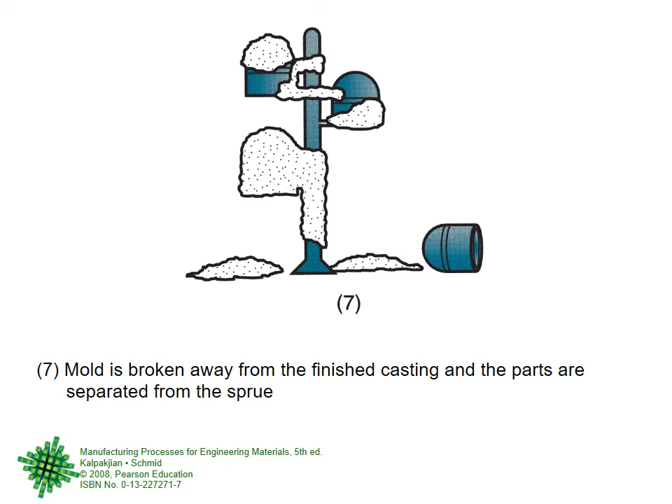As we do many times, I have collected figures of the same process from another source, and once you look at it with different figures, it is easier to understand. So here is a schematic illustration of the investment casting or lost wax process.

Castings by this method can be made with very fine detail and from a variety of metals. So first, a mold is used to make the pattern, and the wax pattern is made using injection of wax or plastic, followed by ejection. So you make a pattern to create the wax pattern, and then you make many of these.

And then you make the cluster, the pattern assembly, also called the pattern tree.

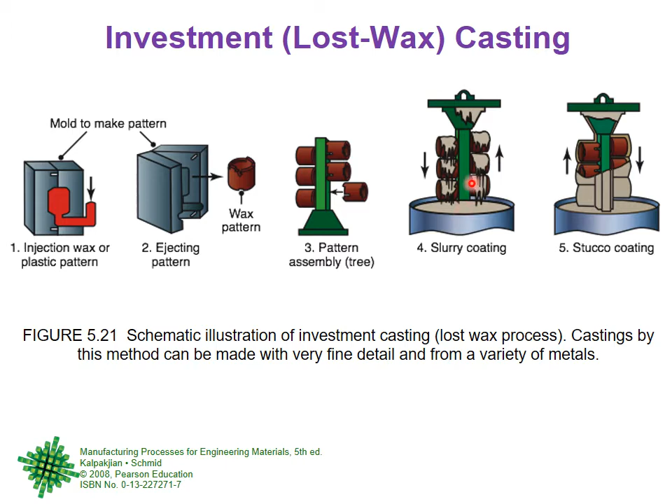And then you take this whole assembly and dip it in the slurry coating. This process goes on, up and down, so that it is very finely covered inside and outside with fine refractory material, and that forms the shell.

So now this is the completed mold. You do a little bit of heating so that the wax melts out.

All the wax will go, since it is in the inverted position. And even after the wax goes away, you keep on heating it so that the shell becomes strong. You call this baking.

And then once it is ready, you do the pouring. Once it pours, you do the shake out, and the casting is there and the pattern is gone. So this is the shell pattern, and you get whatever part you want. This is the whole method.

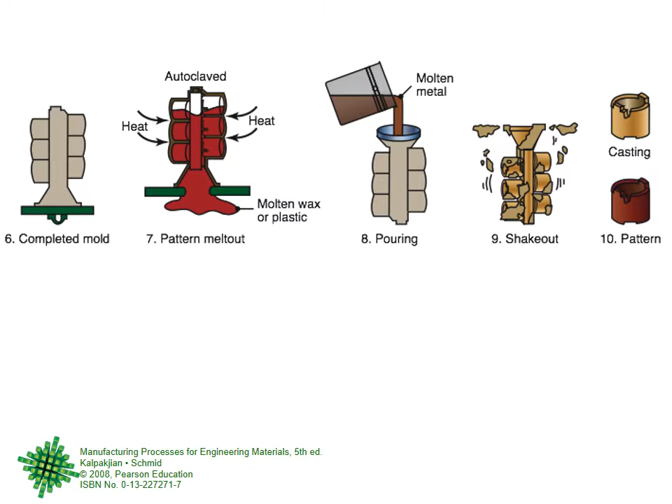Here we are showing you a one-piece compressor stator. Whenever there are moving parts, there is a rotor and a stator - a stator is the stationary part, the rotor is the moving part. Just see the amount of detail here. Very complicated geometry. If you had to machine it out, my goodness, the amount of machining required would be incredible.

But if you do it with casting, the casting method must be very accurate. It is not normal sand casting, where such accurate dimensions would not be possible. So this is the compressor stator with 108 separate airfoils made by investment casting.

So this is real proof that investment casting, this lost wax method, is very precise and very accurate. You can achieve very fine details, very good surface geometry, and so on.

And because of making the cluster or tree, you can produce a lot of these parts at once. The extra cost involved in making the mold for the wax pattern, the heating steps, the slurry, and the tree is all balanced out in the end, because the final product is so accurate that you do not need trimming, surface finishing, machining, and so forth.

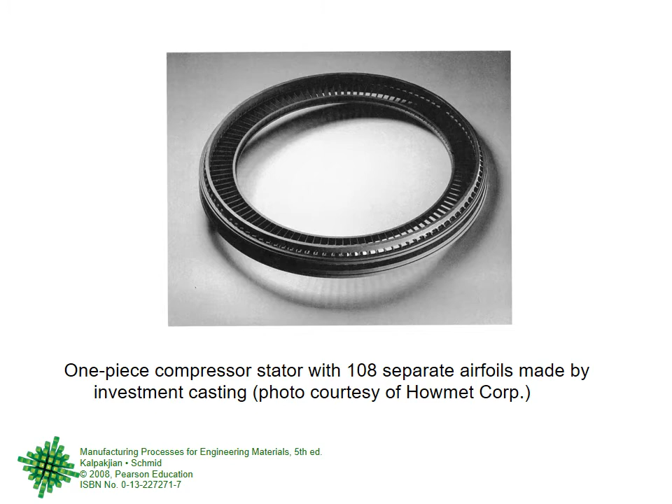From sand casting to other methods like plaster casting and this investment casting, the cost will be different, the quality produced will be different, and the amount of work and time, how much time you need for trimming and those operations, will be different. So overall, this balance of cost, quality and time together has to be the major decision for which type you will use.

What are the advantages and disadvantages? Again you can stop it and you will see that most of it, 70 to 80%, you can tell yourself. If you don't read it, you can tell yourself. You know general sand casting, you know wax casting, lost wax casting.

Advantages: parts of great complexity and intricacy can be cast, close dimensional control and good surface finish. Wax can be recovered once it has melted, so it can be reused. This is a net shape process. Once you say good dimensional accuracy and good surface finish, it is the same thing, that this is a net shape process - additional machining, trimming, surface finishing is not normally required. So this comes directly from here.

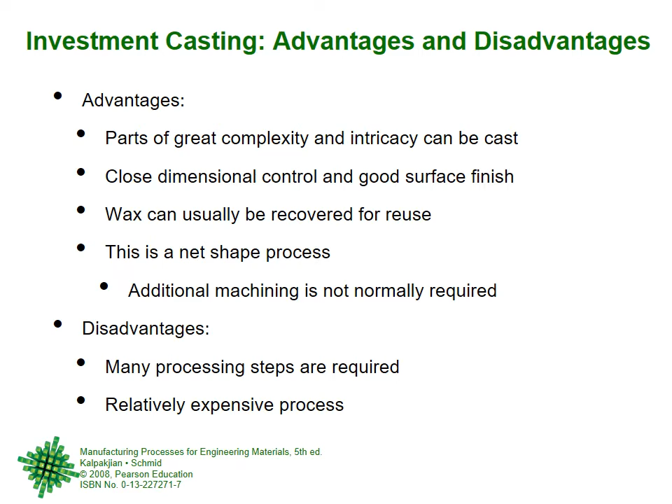Disadvantages: many processing steps are required, and relatively, compared to normal sand casting, it is a little more expensive process. So these are the 2 disadvantages. But as I was trying to explain in the previous slide, the additional cost you incur, when you make castings of very high accuracy and very complicated geometry, the profit balances the cost out, okay?

This is an example. Now this is an example - Rotor. Previously we showed you an example of a stator. This is the rotor, this is one product, this is the other product. So this is the microstructure of a rotor that has been investment cast. This rotor is made through investment casting, and this through conventional sand casting and so on.

If you see here, the grain size is very large. Here, very fine grains if you do it through investment casting. So this is another huge advantage. You remember your material science, right? You remember your Hall-Petch equation, the relationship between yield strength and the average grain diameter. It is inverse - if the average grain diameter is small, the strength and hardness of the material will be better.

So one thing is that the dimensional accuracy and surface finish is good. But the other thing is that in this casting, the dimensional accuracy is okay, the same as here. But if it is larger grain size here and finer grain size there, then all the mechanical properties of this casting are far better, far superior compared to this one. So this is another major reason why investment casting or lost wax casting is done compared to sand casting for many products.

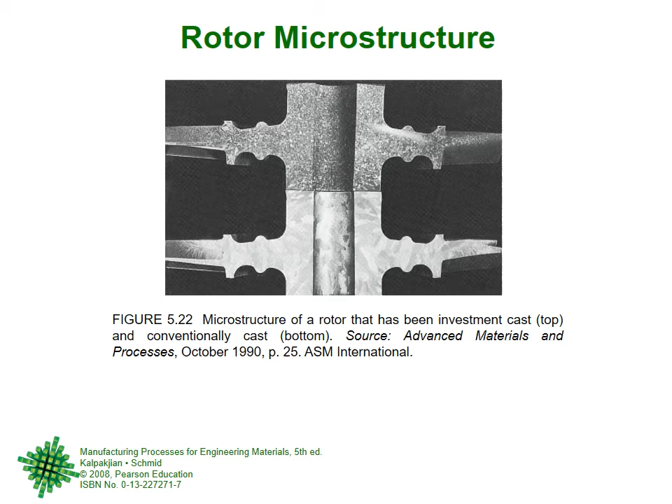With that, we finished the expendable pattern. Remember, all casting was divided into a big first major category: expendable mold, expendable permanent pattern; expendable mold, permanent pattern; then second category, expendable mold, expendable pattern. So the lost wax method or the polystyrene method were of this last kind.

Now we come to the third and last category: permanent mold casting. We are not talking here of pattern because it is not required. Earlier you were saying one word for mold and one word for pattern - expendable mold, permanent pattern. Here it is just permanent mold. So the mold is permanent, the mold will not be broken, the mold will be used again and again. So the mold itself will be of a permanent nature, so you don't need any pattern here. So the name is permanent mold casting.

In the beginning, we just give you a background. Economic disadvantage of expendable mold, where the mold is broken every time - a new mold is required for every casting. So the overall cost, quality, and time is there, and because the technique is very popular, it is there. But this is still a big issue in terms of time, cost, and the material required for the mold.

If I have 5,000 castings, then I have to make the mold 5,000 times, right? In permanent mold casting, the mold is reused many times. The processes include basic permanent mold casting, die casting, and centrifugal casting. So in permanent mold, these three types are there.

Now, I have not just written 'the mold is reused' and stopped there - no, many times. There is no product that can last infinitely, isn't it? Even a Rolls Royce after 50 years will be bad. My normal car after 10 years will be bad, but there will be no car that runs for 500 years. So even the permanent mold, after some time - 50 times, 100 times, I don't know - will have to be replaced. So it can be used many times, but not infinitely.

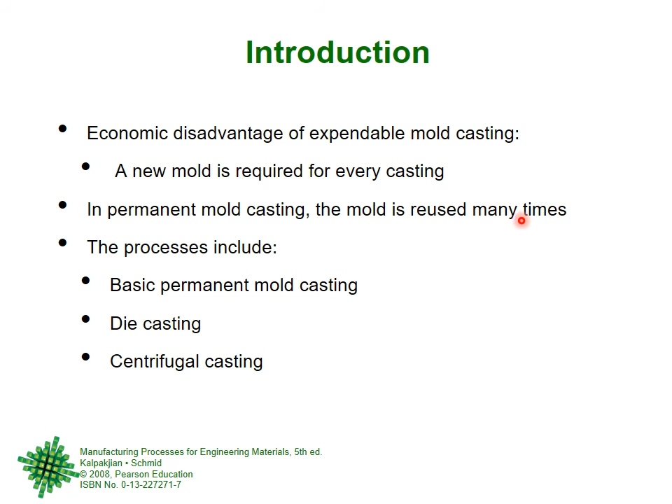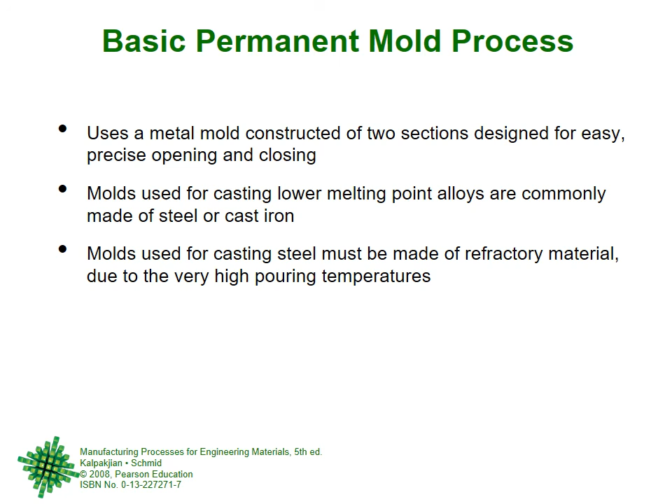Therefore, usually there is one direct disadvantage. Huge advantage: the mold can be used again and again. But one direct disadvantage is that because the mold is now made of metal, it can be used only for casting those alloys which have a melting temperature several hundred Celsius lower than the mold's melting temperature.